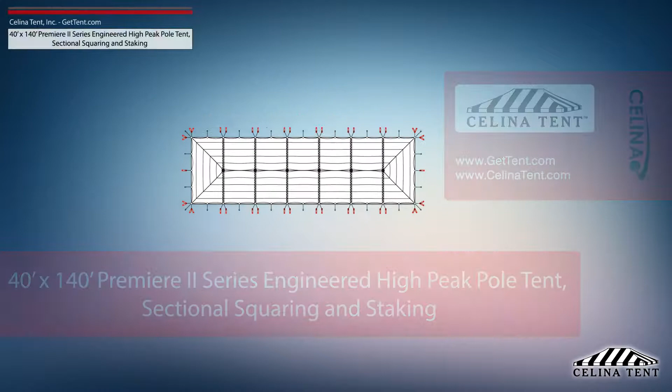gettent.com. This video covers squaring and 5-foot staking, applicable to a sectional 40-foot by 140-foot Premiere II Series high-peak pole tent from Celina Tent. 5-foot staking is standard for tents with an eave height of 7 or 8 feet, and would need to be adjusted for eave heights other than this standard.

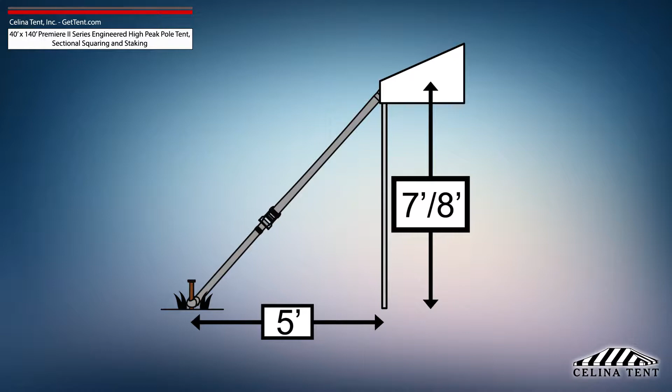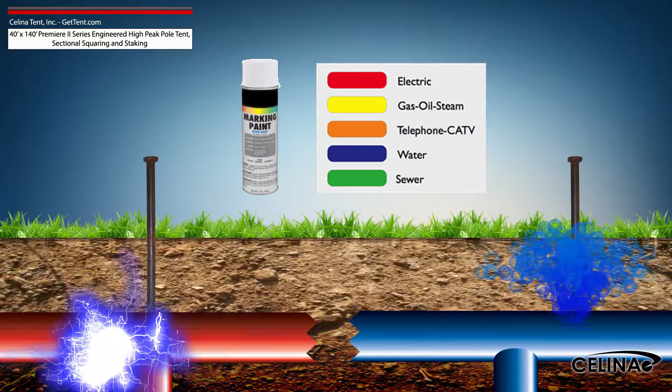Tent squaring allows the installer to accurately place all tent hardware and install tent stakes prior to beginning setup, and helps let them avoid any marked underground utilities. Utilities must be marked by your state's local utility services prior to any tent installation.

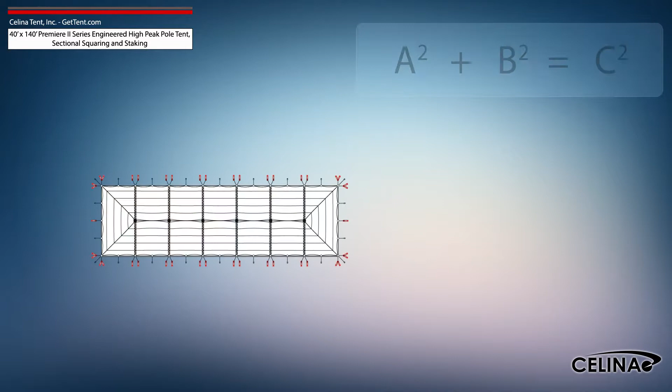Using the Pythagorean theorem and adjusting out for 5-foot staking, the entire tent footprint will be 50 foot by 150 foot, with a 158 foot, 1-inch diagonal length.

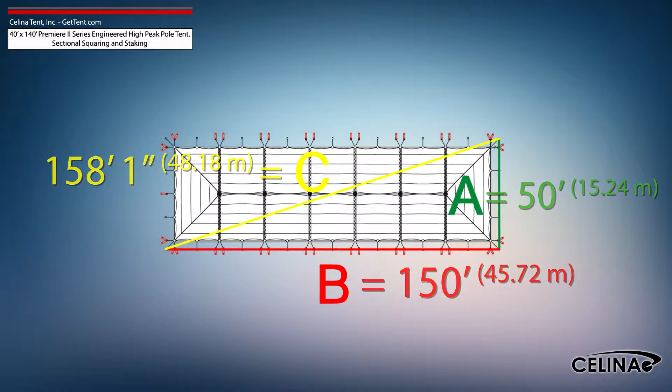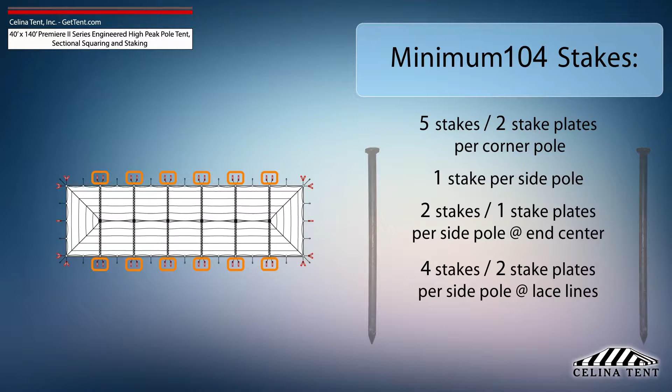Celina recommends that a 40 foot by 140 foot Premiere II Series high-peak pole tent receives a minimum of 104 stakes: 5 stakes and 2 stake plates for each corner pole, 1 stake for each side pole, 2 stakes and 1 stake plate for the side pole at the center of each end, 4 stakes and 2 stake plates for each side pole at lace line locations, and 1 stake for each center pole.

This amount of stakes provides the minimum amount of security for a pole tent of this size. Additional staking is required for any site that doesn't meet optimal soil conditions. Tent staking is the most important safety procedure during tent installation. Tent stakes should be driven vertically so that the stake is as close to the ground as possible with space to tie on a strap.

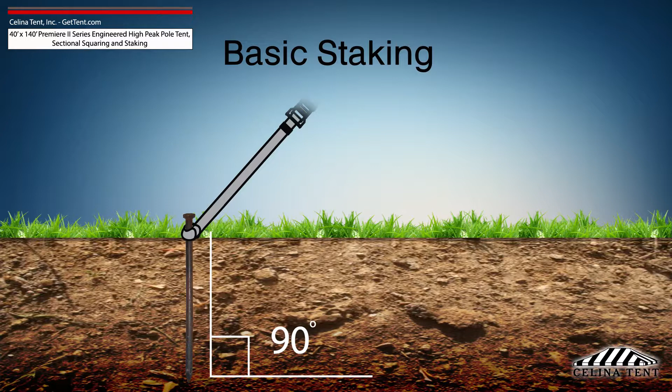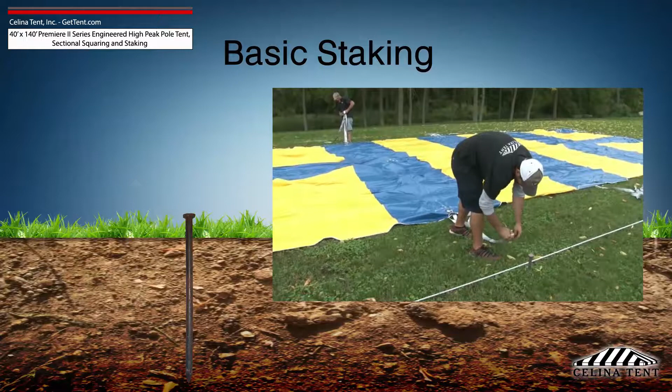Any length of stake protruding from the ground that is more than 6 inches will have detrimental effects on the holding power of the stake. Attach the ratchet strap or rope as close to the ground as possible to reduce strain on the stake. It is the installer's duty to inspect the soil conditions and possible weather effects for the duration of the tent installation. For water-saturated or loose soil, more tent stakes are required to achieve adequate anchoring.

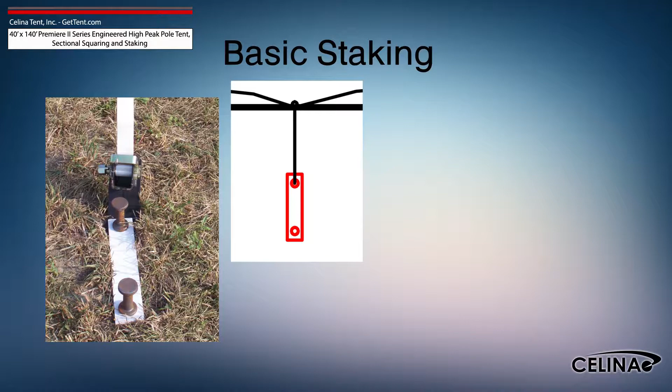Staking may be increased using dual stakes and a staking plate, or gang staking utilizing 2 staking plates and 3 stakes.